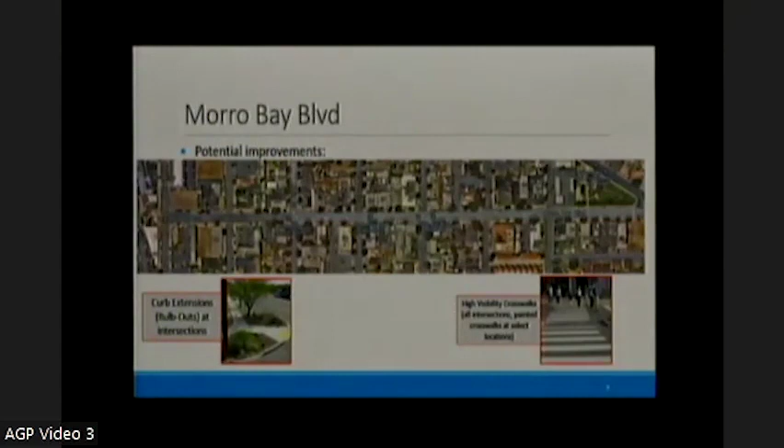Installing speed feedback signage at additional locations along the corridor to let drivers know their speed and if they should slow down. Installing sharrows on the Morro Bay Boulevard corridor to let drivers know they should be sharing the road with bicyclists if they're present. We also look at striping Morro Bay Boulevard to narrow the travel lanes and delineate the parking throughout the corridor. Narrower travel lanes have been shown to slow down traffic if speeding is occurring.

Also, one thing we could look at is pedestrian warning or yield signage at uncontrolled intersections, just to let folks know as they're approaching the intersection they should yield to oncoming traffic. We could also look at what's called a rectangular rapid flashing beacon, or RRFB, at Morro Bay Boulevard and Morro Avenue, Bernardo Avenue, and Kern Avenue. Essentially this would be a treatment to give a more high profile crosswalk that could be activated by the pedestrian. It would have a flashing light and let drivers on the corridor know there were pedestrians crossing - gives more visibility, and has been shown to improve safety for pedestrians crossing at uncontrolled locations.

One thing we also look at is reducing the lane width at Morro Bay Boulevard and Kern Avenue westbound. Something we looked at in the public comment and crash data is there were some issues with speeding here and cars overtaking each other as folks make that left turn onto Kern Avenue from Morro Bay Boulevard westbound. So just reconfiguring that intersection to make it a little bit more safe. Also looking at the Morro Bay Boulevard and Harbor Street intersection, there is a free right turn there, which sort of encourages speeding and is also a little bit less safe for pedestrians. So one thing we could do is either reduce that turning radius to make it a little bit safer, or eliminate the free right turn altogether.

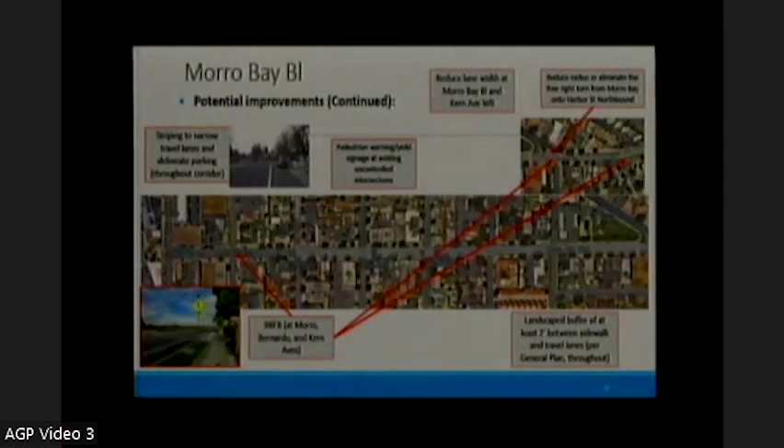And then we also looked through the general plan that the city's put together, and a landscape buffer of at least 2 feet between the sidewalk and the travel lanes was in there. We feel this should be included in this plan just to keep consistent with that, and it would protect some pedestrians along the corridor.

Our next corridor we looked at was Embarcadero from Marina Street to Beach Street. Some issues we saw here: improper turning, which is essentially turning right or left when it's not safe to do so, and unsafe starting or backing, essentially pulling out when it's not safe to do so. Some major crash types we saw were rear ends and side swipes, and delivery trucks causing congestion during peak hour, based on comments from the Public Agency Advisory Group and our public engagement.

Other issues that came out were visibility of crosswalks, parking availability, and major traffic congestion during holiday weekends, which can be an issue for emergency vehicle access. Public comments we received included heavy bike usage, so we're potentially looking at additional signage and striping for bikes as well as cars. Folks using the safety mapping tool had concerns with pedestrian safety and recommended crosswalks, beacons, and striping. Those have really informed our potential improvements for this stretch of the Embarcadero.

First, we're going to be looking at high visibility crosswalk striping and curb bulb-outs at all the intersections, potentially looking at rectangular rapid flashing beacons, or RRFBs, or raised crosswalks at select intersections. These would give more visibility to pedestrians.

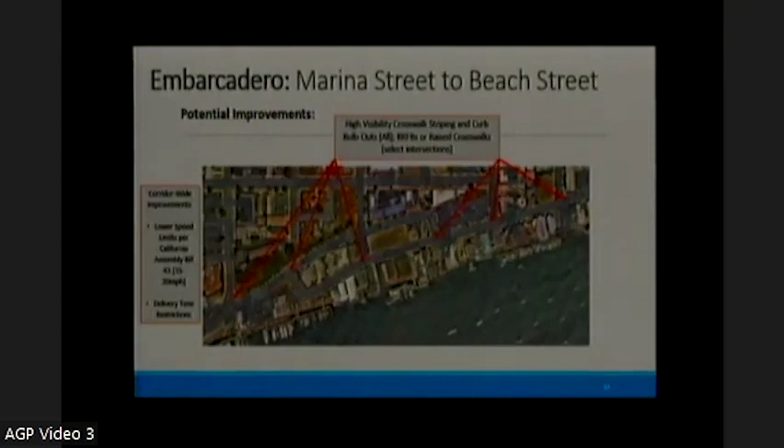Some corridor-wide improvements we'd be looking at are lowering the speed limits along the Embarcadero per California Assembly Bill 43. This is a new statewide law that allows cities and municipalities to reduce speed limits beyond the standard 25-mile-an-hour speed limit based on different land use types or presence of pedestrians. This would allow the city to reduce the speed limit on this stretch, and also look at delivery time restrictions to potentially relieve some of the issues we're having with delivery trucks on the Embarcadero.

The next location we looked at was Quintana Road from Main Street to Morro Bay Boulevard. Some issues we saw here: unsafe speed, wrong side of road crashes, a few DUI crashes unfortunately, and a lot of automobile right-of-way violations. We also saw some broadside crashes and hit object crashes.

The main public comment we got here was that visibility when turning out onto Quintana Road from the shopping centers was less than ideal. So it's something we could address.

Potential improvements along the corridor include installing a median island with left turn pockets throughout the corridor, which would address some of the head-on and hit object collisions we were seeing. Curve warning signage for the curve on Quintana Road. Speed feedback signage that would give drivers feedback if they were going too fast. Rumble strips, which give an auditory signal to drivers if they drift off the roadway. And potentially reducing lane widths, which has been shown to reduce speeding along straightaways like this. Also, painted bicycle lanes along this corridor would be beneficial to bicyclists.

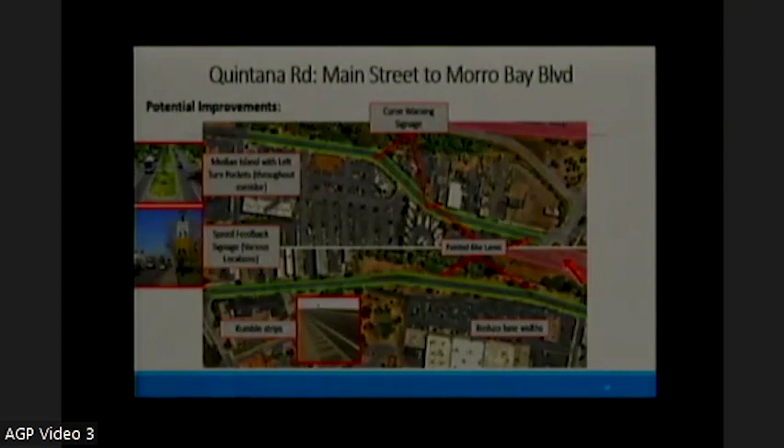Another location we looked at was Main Street and Quintana Road. Issues we saw here: unsafe speed and following too closely were major causes, as well as improper turning. Major crash types were rear ends, hit objects, and broadsides, like T-bone collisions. We had 2 pedestrian crashes here and 1 bicycle crash, so improving bicycle and pedestrian safety would be key here.

Some potential improvements we're looking at here are retroreflective backplates on the signal heads. As you'll see in the picture, this gives more visibility to the signal heads, especially at night. We could also review yellow and red signal timing to see if it's sufficient for the level of traffic we're seeing here.

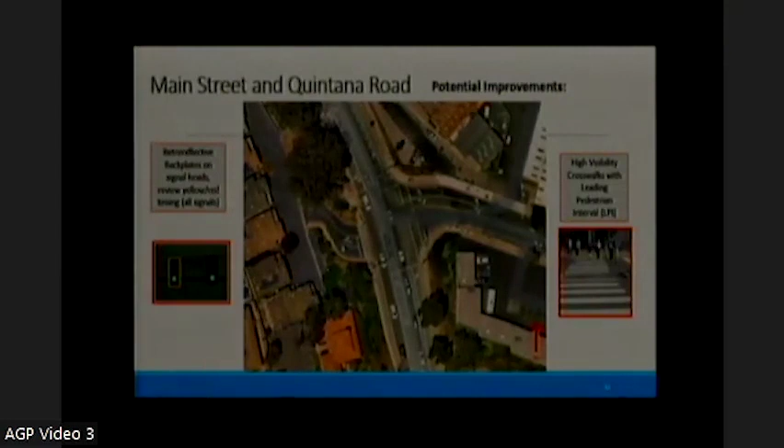We could also install high visibility crosswalks with leading pedestrian interval timing. Leading pedestrian interval timing gives pedestrians using the crosswalk a 2 to 3 second head start before the green signal in the same direction goes, giving a bit more visibility to pedestrians using it. It's only activated when there are pedestrians present, so it has minimal effect on overall signal timing.

Some other potential improvements we could look at were bicycle connections. As you can see on the northwest corner of the intersection, there's a bicycle path that stops at this intersection. So what we would propose is some connections to that bicycle path, which would require a configuration change requiring a diagonal crossing to go from the northbound bicycle lane to that bicycle path.

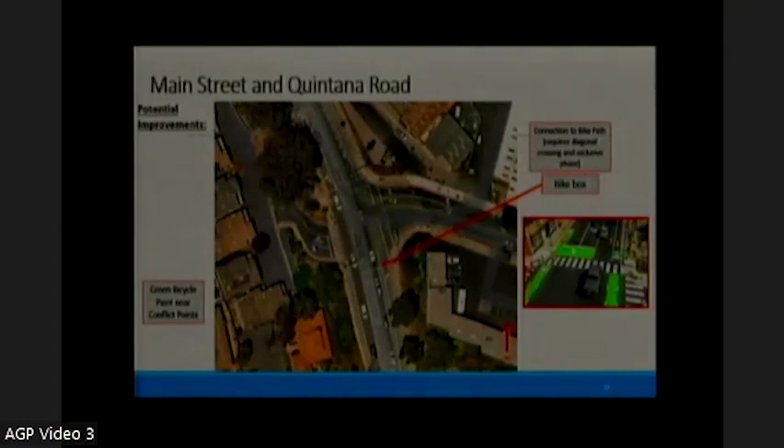This would require an exclusive phase, a more intensive treatment here. We'd also look at potentially putting a bicycle box at this intersection to get bicyclists out in front of traffic so they're more visible on this corridor, and additionally green bicycle paint near conflict points to give drivers more visibility that there will potentially be bicyclists on this corridor.

Other potential improvements: the northbound right curve radius is a little large, which can potentially encourage speeding as folks take that northbound right. We could reduce the large curve radius to encourage lower speeds as folks make that turn. Also, we could look at installing advanced signal warning beacons and signage before the intersection to alert folks traveling on Main Street that there's a signal coming up as they approach.

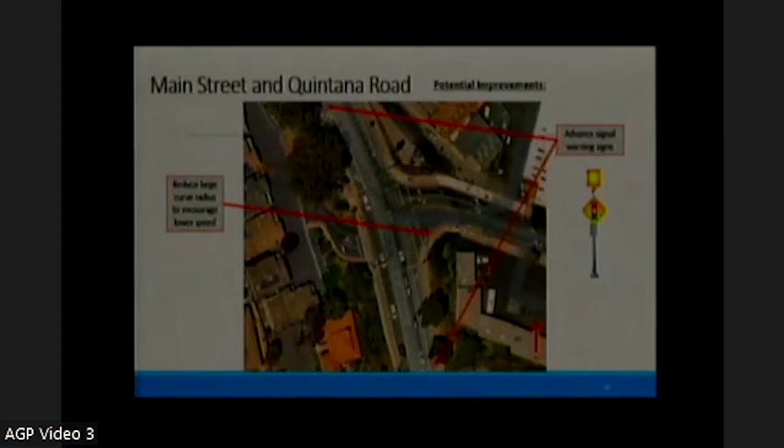Another location we looked at was Main Street from Highway 41 to Hill Street. Really what called us to this intersection was that the bicycle lane is a little space-constrained, and that's something we heard in the engagement and in the public comments.

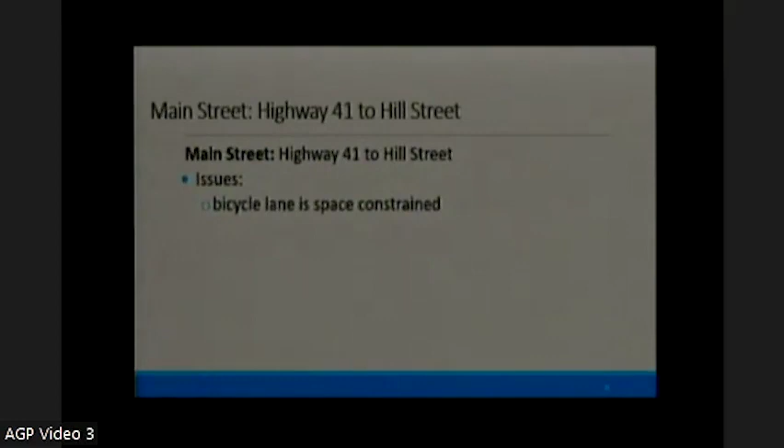Some potential improvements: we could reorganize the lane widths to balance out the northbound and southbound bicycle lanes, making the southbound bicycle lane less constrained up against that fence near Highway 1. We could also look at installing a two-way cycle track, so both bicycle lanes in each direction would be along the same side of the road, or potentially putting a multi-use path with bicycle lane and sidewalk on the same side of the road on Main Street.

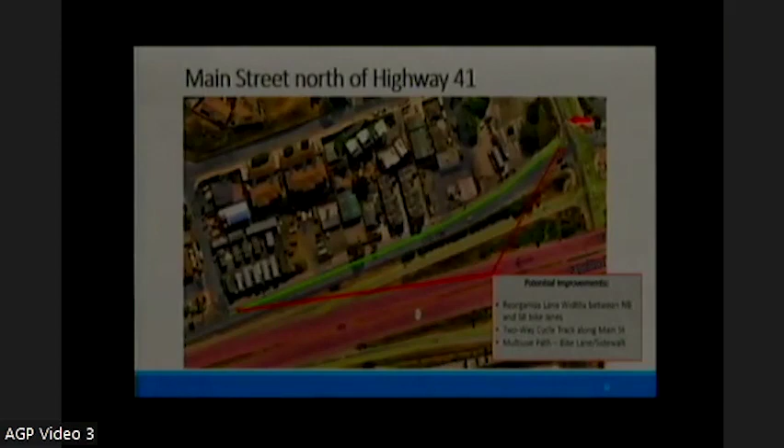Another location we looked at was Quintana Road and South Bay Boulevard. This one really popped out in our crash analysis. Some major crash types we saw here were broadsides and rear ends. Major crash causes: unsafe speed, folks speeding just off of Highway 1, still going quite fast coming off the freeway, and automobile right-of-way violations, folks not yielding to the correct right-of-way as they make their way through this intersection.

There were a lot of public comments here in our engagement and on the survey tool we looked at. Folks said there were many near misses they've experienced, visibility issues with a left turn coming from Quintana Road onto South Bay Boulevard northbound, and generally felt there was poor visibility and high speeds at this intersection.

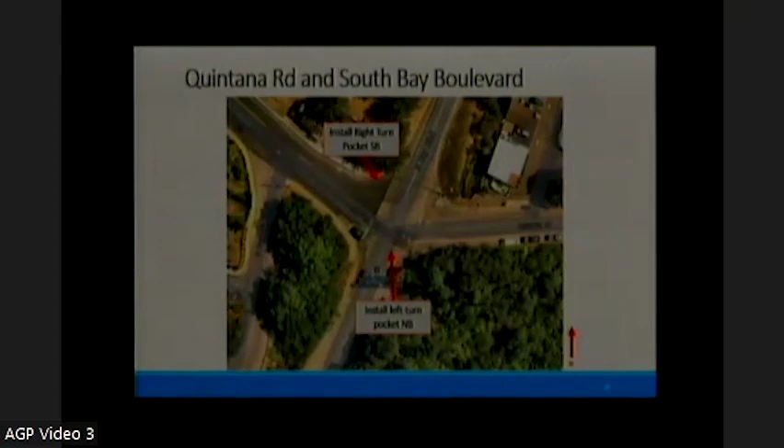Something we could look at here would be to install a right turn pocket southbound, which would help folks turning southbound right get out of the southbound main lane, increasing visibility and reducing some of the rear ends we saw. Also, we could install a left turn pocket on the northbound side so there would be a left turn lane for folks turning northbound left onto Quintana Road, which would again reduce some of the rear end crashes we saw here.

Other potential improvements: we could install advanced signage, retroreflective or flashing beacons, to let folks know there's a stop sign coming up. We could also install a flashing beacon over the intersection to let folks know, both on South Bay Boulevard and on Quintana Road, that there are potential conflicting movements occurring.

We could also look at installing an all-way stop or a traffic signal. This would be more of a major change. We would need to review the traffic signal or all-way stop warrants for this intersection to see if the volumes and crash history are appropriate. I believe the city did a study previously and it did not meet the warrants, but we would potentially look at that again with the updated data from this study.

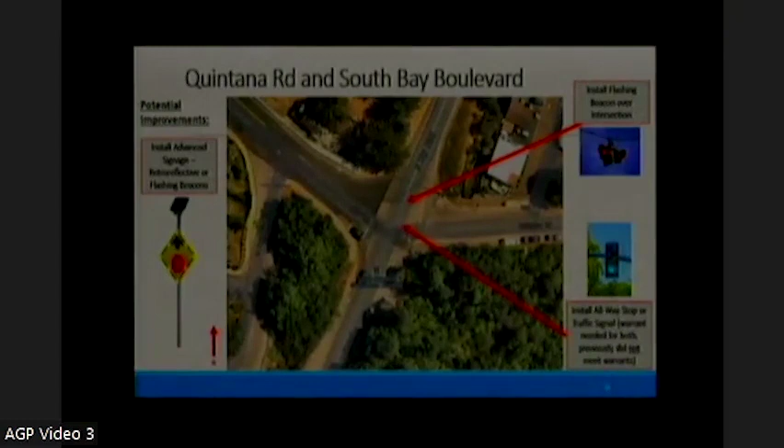Another location we looked at just to the south of there: South Bay Boulevard from Quintana Road to the city limits. Major crash causes we saw here were unsafe speed, DUI crashes, and unfortunately wrong side of the road crashes. Major crash types were hit objects, overturned, or head-on crashes here.

Some public comments we got at the engagement: folks felt that the bike lane was quite narrow and that tree and debris maintenance was needed. Rumble strips would be useful on this corridor just to get folks to stay in their lanes. Some folks felt that crossing South Bay Boulevard at State Park Road was a little tricky.

Some folks suggested a flashing crosswalk. I just want to note here that SLOCOG, the San Luis Obispo Council of Governments, did receive a climate adaptation grant for this corridor because in the future it's potentially looking at some sea level rise issues. So they're looking at this corridor on a more regional basis, maybe some potential realignments. We've kept that in mind in our potential improvements here.

So some potential improvements: an interim, smaller, short-term improvement would be to install rumble strips, or what we've called mumble strips. They're sort of less noisy strips that let drivers know if they're drifting out of their lane. Longer term improvements would be to widen the bicycle lane or install a multi-use path, which would include bicycle and pedestrian lanes.

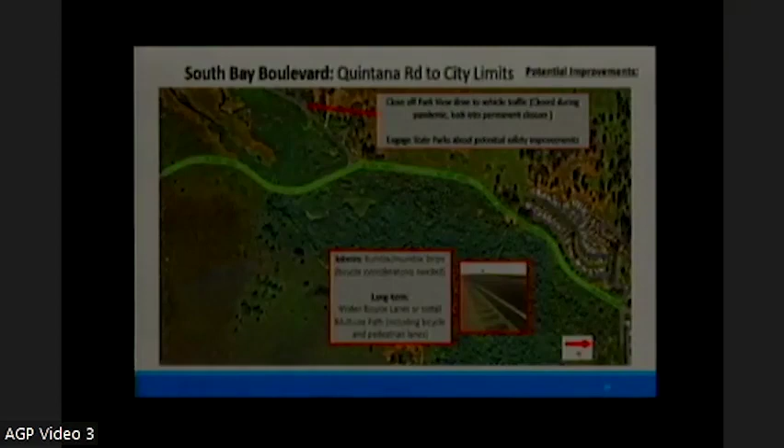In addition to those corridors, we also looked at some improvements on Main Street. A few intersections on Main Street really popped out to us in terms of the crash analysis and the public engagement that we were looking at.

First of which was Main Street and Radcliffe. We got a lot of public comment here about concerns about visibility, about safety, and about accessibility of people making a left turn from Radcliffe onto Main Street. Folks felt that there was a lack of sidewalks along Main Street to the north of Radcliffe.

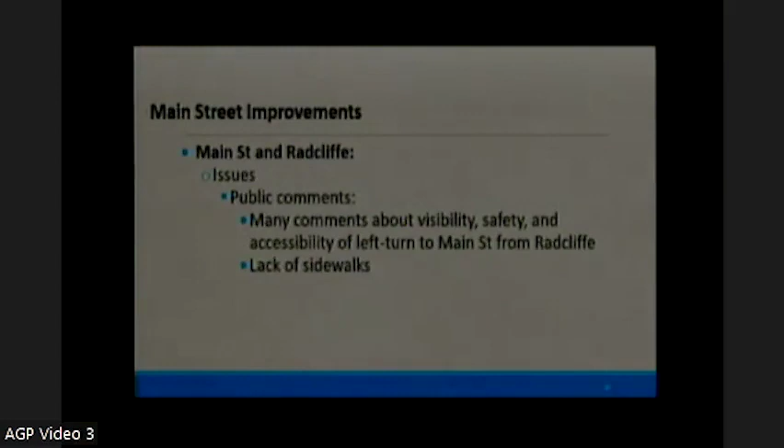So some potential improvements: we could complete that sidewalk gap from Radcliffe to the north. We could also review the intersection control. Again, this would require us to look at some warrants to see if the volumes of Radcliffe and Main Street are appropriate for either an all-way stop or a signal.

We could also install signage or flashing beacons to alert drivers on Main Street of some potential conflicting movements. That would give a little bit more visibility to folks who are going up or down Main Street approaching this intersection.

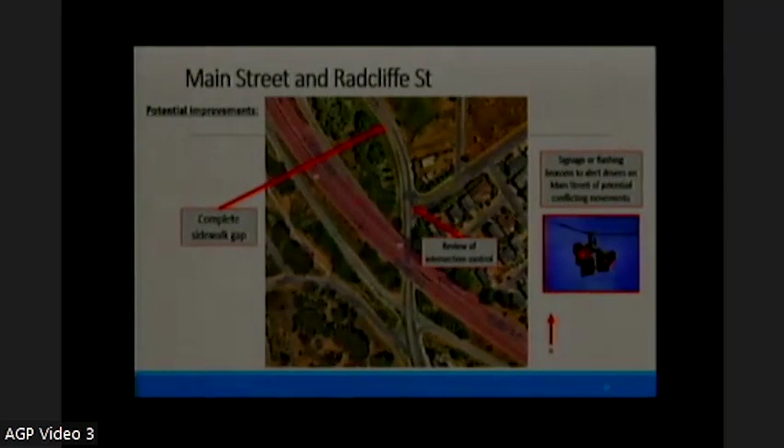Next location we looked at was Main Street and San Jacinto. Some issues we saw here: folks saw a lot of stop sign running in the public comment. Major crash causes were automobile right-of-way violation, so folks not yielding to the correct right-of-way, and improper turning. Some major crash types we saw were side swipes, broadsides, and rear ends.

So really, this is a bit of a tricky intersection. There's the San Jacinto and Highway 1 intersection, and just to the east is Main Street, and then just to the east is Adler Avenue. We thought one potential improvement here would be to close off Adler Avenue to give a little bit more space between the intersections, and to reduce some of the rear ends and broadside crashes that we saw at this location.

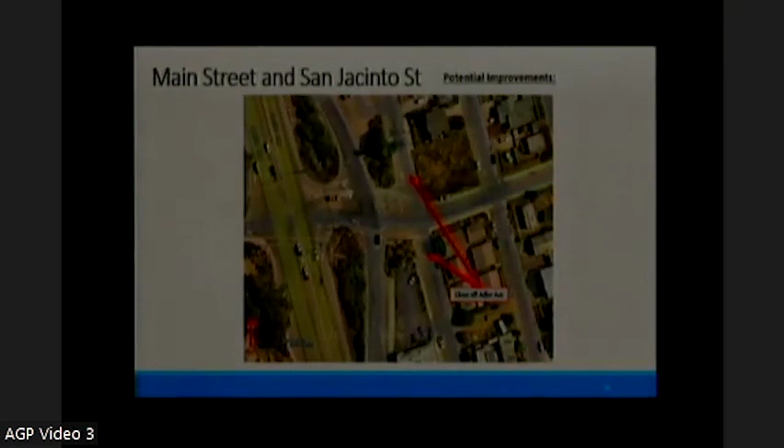Another location we looked at was Main Street and Yerba Buena Street. Really, this popped out on the public comment portion of this project. Many folks felt that drivers failed to stop at the stop signs here, and there were some potential pedestrian safety concerns here as well.

At this location, we could potentially install a traffic diverter or elbow. If you look at the picture here, you'll kind of see what that looks like. Essentially, we would have Main Street northbound going towards Yerba Buena and Cabrillo Highway, and Main Street southbound would make what they call an elbow with Yerba Buena Street.

That would reduce some of the congestion and safety concerns for folks traveling northbound on Main Street trying to get onto Highway 1. This would be more of a long-term, larger scale improvement. But we could also look at installing a traffic signal or a stop sign at this intersection, and again we'd have to review the warrants for appropriate volumes and crash histories.

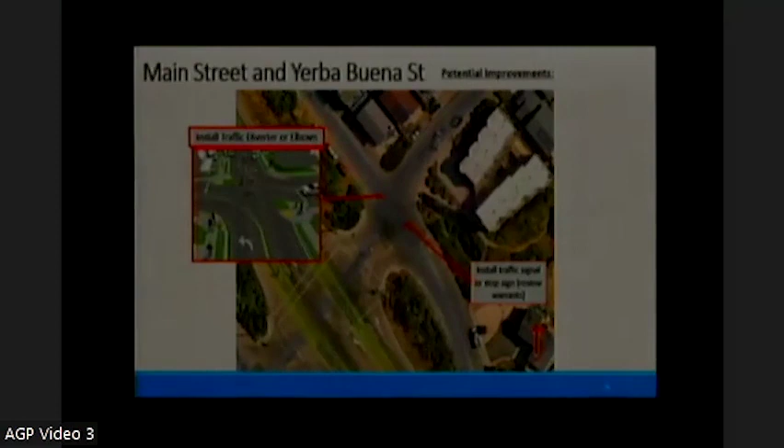We also looked at Main Street and Dunes Street. Some issues we saw here: improper turning and automobile right-of-way violations were our main two causes of crashes. A lot of broadside, so those T-bone crashes, side swipes, and rear-end crashes, pretty common at intersections like this. Some public comments: many folks felt that drivers failed to stop at the stop sign here, and there were some pedestrian safety concerns here as well.

One thing we could do here is install high visibility crosswalks to give a little bit more visibility to pedestrians, and let folks driving on Main Street who don't have a stop sign here know that when pedestrians are in the crosswalk, they do need to stop. We could also look at installing an all-way stop at this location. This is the only intersection on Main Street that does not have a stop sign, I believe, and we'd have to look at warrants for appropriate volumes and crash history as well.

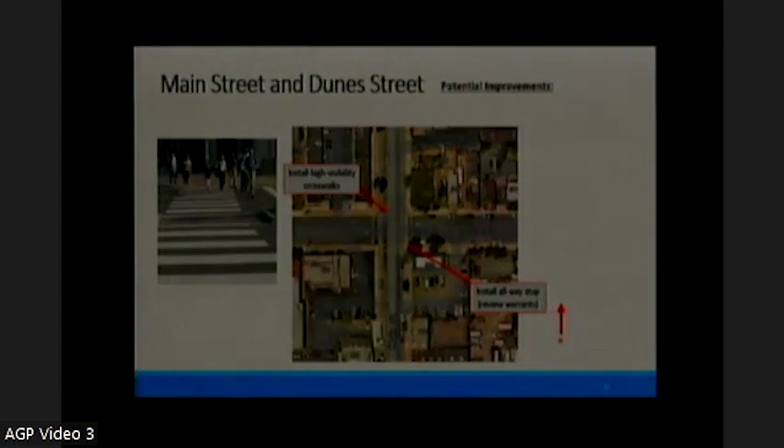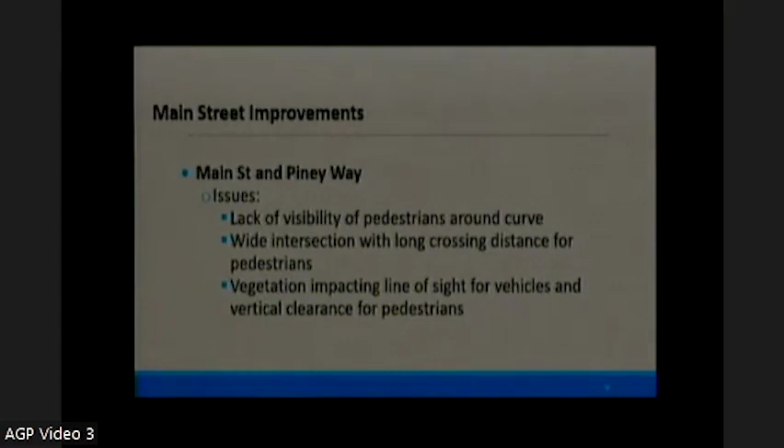We also looked at Main Street and Piney Way. Issues here include lack of visibility, especially for pedestrians around the curve, and a wide intersection with a long crossing distance for pedestrians. Potentially there are some issues there, and some folks felt that vegetation was impacting the line of sight for vehicles and vertical clearance for pedestrians here.

So a few different things we could look at here. First is to install a protected crosswalk, like I mentioned, those RRFBs, rectangular rapid flashing beacons. That would be a more visible crossing for this location. We could also change some of the striping to reduce the width of the lanes and reduce crossing distance for pedestrians. That would be more of a short-term fix, a lower cost fix.

We could also realign this intersection to reduce speeding, making the curve a little less smooth to make folks pay attention more, or install speed signs along Main Street generally in this area to let folks know they should be adhering to the speed limit, and if they're traveling too fast, that they should be slowing down.

In addition to these corridors, we also looked at traffic calming on local streets and some collector streets. Really how we're focusing here is we're going to have a toolbox of strategies to apply to these local streets.

This will require some more local engagement with the city to make sure that folks who live along these streets are comfortable with these improvements.

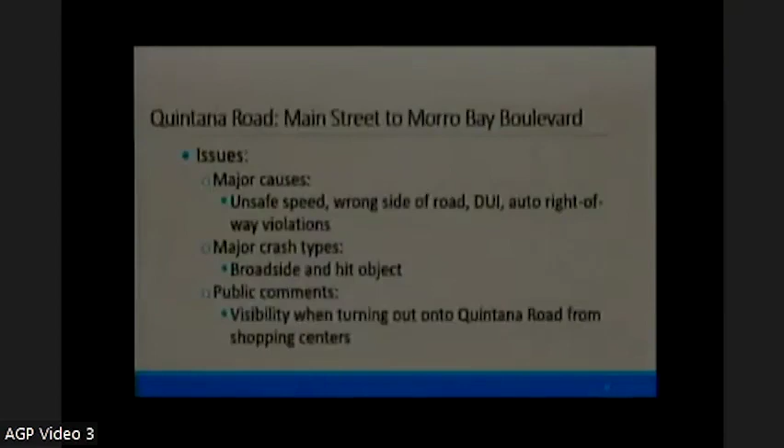Just want to go back to the Morro Bay Boulevard location real quick before I jump off. One comment we received on the public engagement online tool and in some letters for this meeting is about the Morro Bay Boulevard and Quintana Road roundabout. Just want to let you know this will be a location we're looking at in the draft LRSP. We're looking at improvements mainly focused on driver information, making sure drivers know which lane they need to be in when approaching the roundabout, and also focusing on speed reduction, making sure folks are approaching the roundabout at an appropriate speed. So just want to let everybody know that will be in the draft LRSP as well.

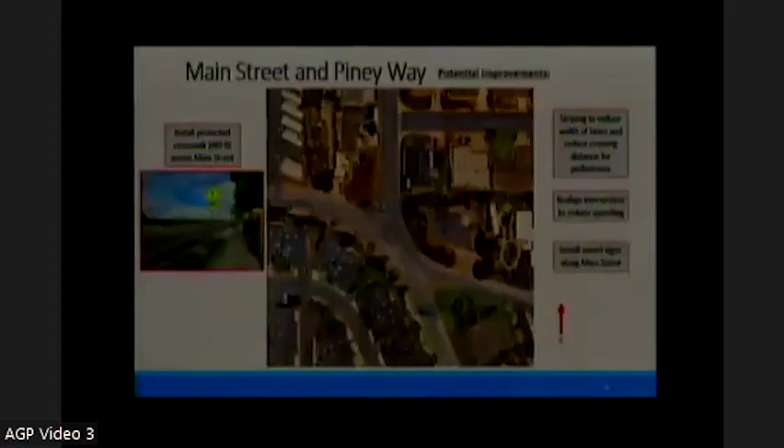Yeah, and that's it for me. Thank you all for your time, and welcome any questions and discussion now.

Thanks, Kyle. Yeah, so this is the time for any questions from the board. Okay, well, do you want to start, Robert? My list isn't that long, so yeah, thanks.

Just curious, because I haven't gone down to find out myself, but does the city public works department have stencil and striping equipment or a crew or any availability to do this on their own and piecemeal? Or is it the kind of effort that would require contracts where we have mobilization of a contractor?

Thank you for the question, Board Member Nava. The city crews do not have striping stencils or striping equipment to do this on their own. I believe in the past they've done some refreshing of crosswalks that have straight lines, but anything that would require stencils or other striping would have to be contracted out, especially green paint or Sharrow logos. That's correct, the green paint is a very specialized, two-part product that requires some expertise in application.